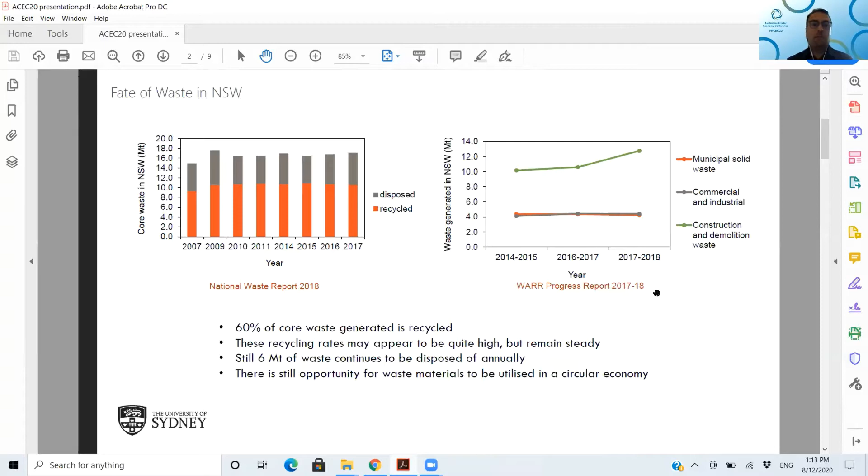So because of the similarity between these and the materials that we use in roads and pavements, there is a great opportunity here to reuse them in road construction. Circular economy in New South Wales in general tries to keep products and materials in use for as long as possible, and adapting the same concept, we can come up with this material flow cycle for roads and pavements to reduce, divert, reuse, repurpose, and most importantly, which is the message of this conference, to focus on design of the product early on, to allow us to have that circular economy concept going.

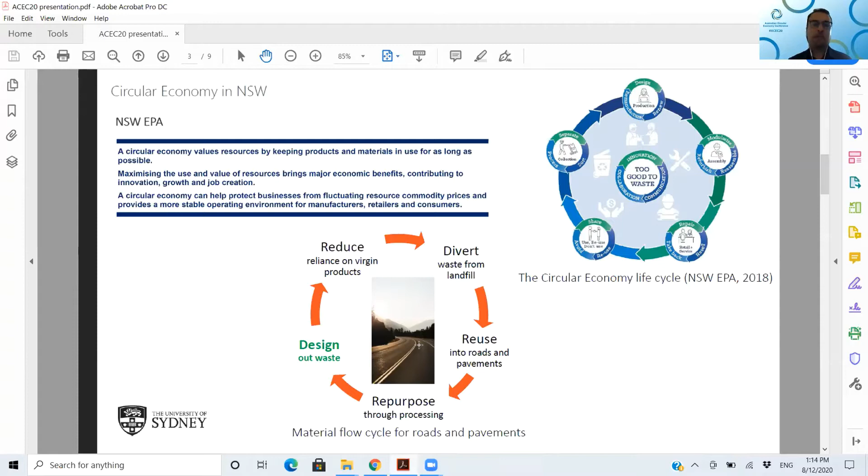One of the projects that we're very proud to work on in collaboration with LG New South Wales, and I'd like to thank LG New South Wales on behalf of the Waste Transformation Hub for this great opportunity, was to develop a guide for local councils about recycled materials in roads and pavements. So, 2 documents.

About the guide, just in a nutshell, the motivation was: we all know that recycled materials like glass and plastics are already being used and trialed in roads and pavements by councils, but there are always concerns about compliance with EPA requirements, the public perception of health and safety, and of course the cost to the council, and the challenge is to generate that confidence. So the guide offers guidelines on how council engineers can make an informed decision about starting recycling projects and how they can incorporate that in roads and pavements.

And it tries to do that through 6 chapters, which I'm going to explain in a nutshell. We try to break down the whole process into key implementation steps. So if you are a council engineer and you want to start a recycling project, you first start by reviewing what the options out there are. Chapter 2 tries to give you that sort of knowledge. For example, you know that glass or fly ash is already being used, so that gives you the green light to move forward. And then you go to step B.

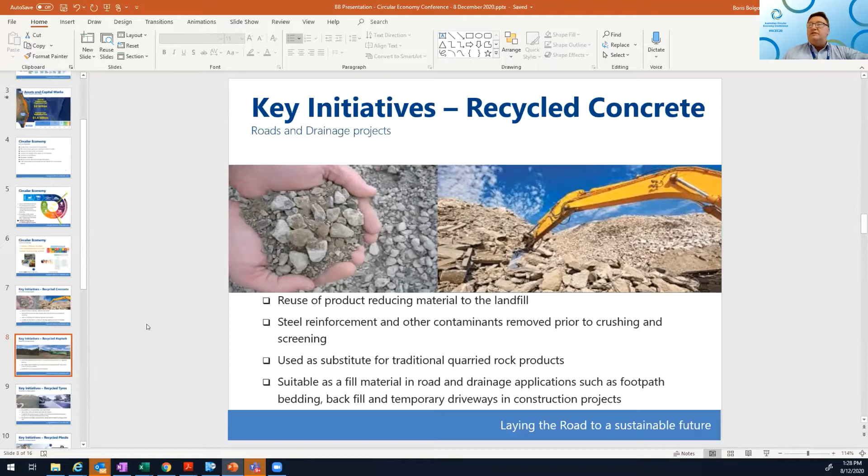So recycled concrete has been around a while, used as a great base in a lot of road and path construction. We've got recycled asphalt. Again, it's been around quite some time, but it means we're not having to use some of that natural resource that I mentioned earlier.

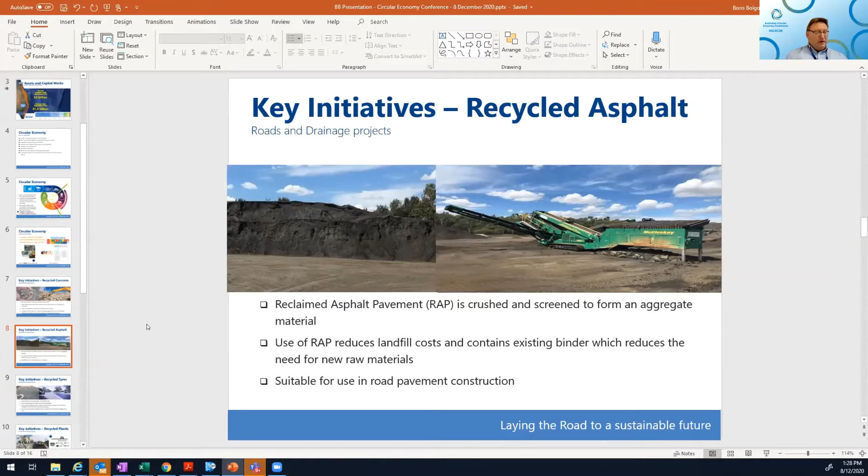So recycled tyres, using your spray seal. So that's combined, using recycled truck tyres combined with your bitumen. You can get, again, a product as good or better than what you would get without that material.

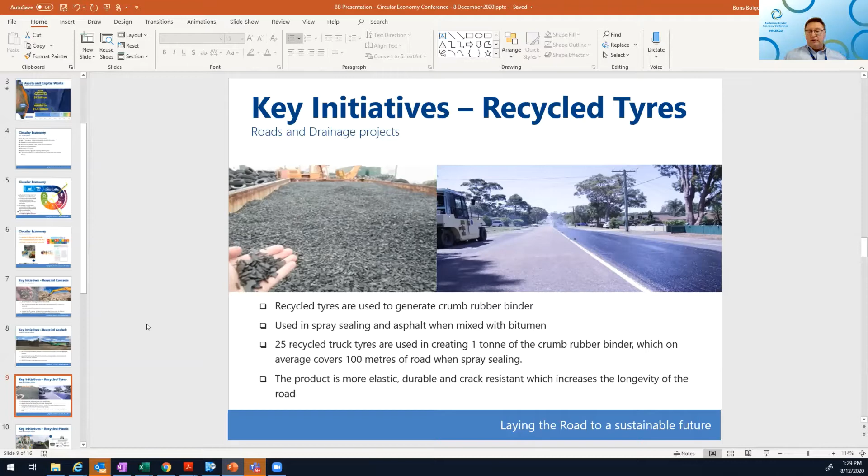So some of the techniques, again, getting it out there. I tend to use LinkedIn. So sometimes we promote these, do a media release, and then put that out on LinkedIn to try and get a little bit more, again, visibility, traction in this space.

Probably running a little bit behind time, so I'll speed up a little bit.

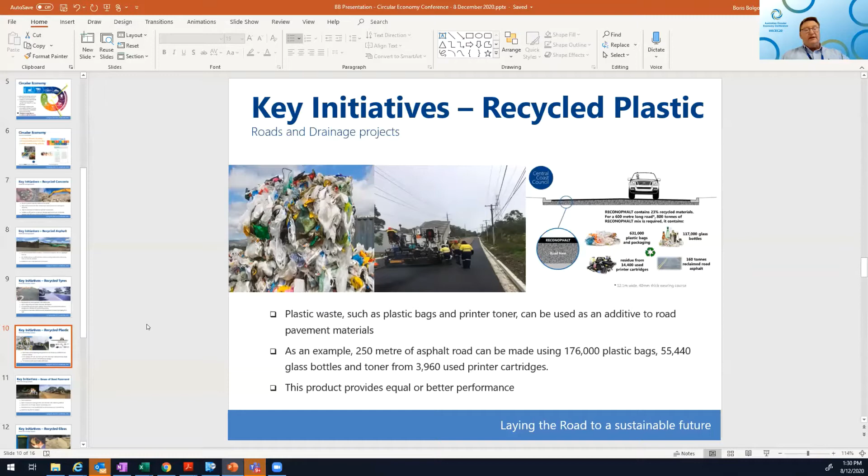With this, the other initiative, because there was glass in there, plastic bags, we targeted some schools where we had to do renewals, and we got the kids to collect the materials that actually went in their road right in front of their school.

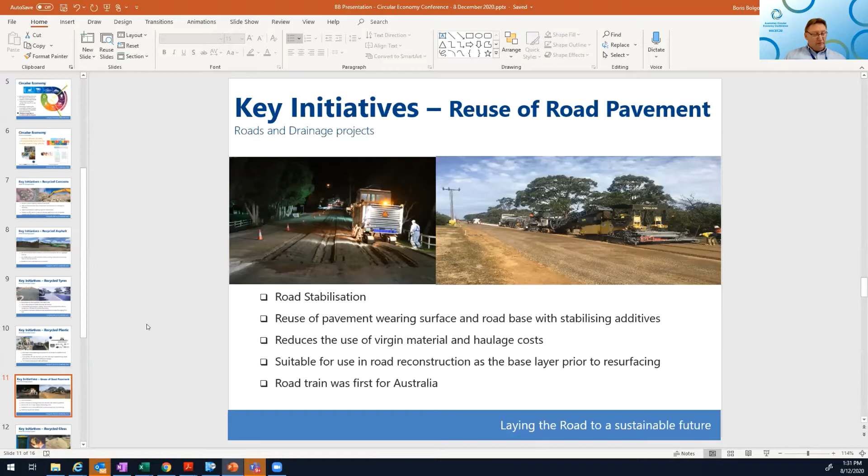Just another project. This was an Australian first. This is road stabilisation. To the left is the conventional method. SPA, one of our contractors, brought in some machinery from Germany, and we had this road train which uses a foam bitumen, and I suppose for some of those councils that are in regional areas, this can do long areas very, very quickly, and gets almost to an asphalt type surface at the end. So if there's any questions, again, certainly prepared to talk to people a little bit more about those sorts of things.

The other thing, just in relation to some of our partners, we've got obviously collection with the yellow bin. So glass goes through there. Our partner is IQ Renew that collects that, and they are separating all the bottles. Some of the challenges here is that the quality of the glass was fairly poor because it had a lot of the stickers and the wrapping in that, so it didn't actually act as free draining sand.

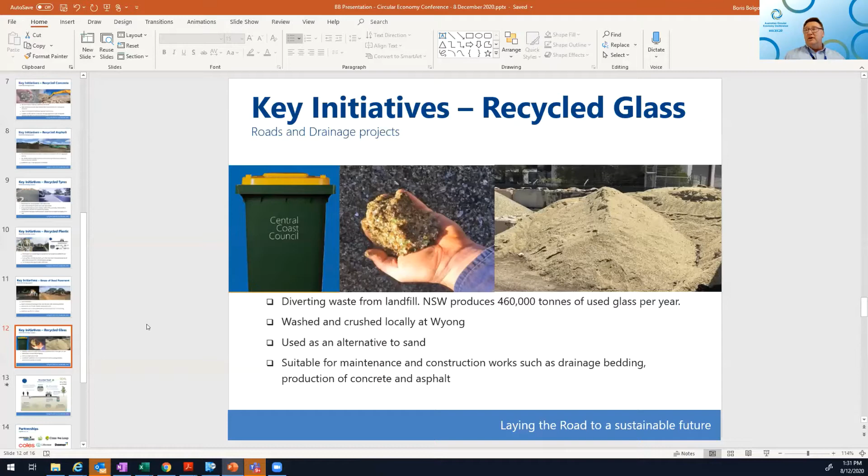Working with us and with our lab, we certainly got them to put another cleaning process in, which went really, really well, and it's almost like beach sand when you look at it. I suppose success for me is when the staff start coming to me and asking me, what about this, can we do that? And got the idea of, can we make a recycled road? And we got to about 90% recycled.

From the pavement area, we're certainly using existing pavements, bringing them back, using the recycled concrete, using the glass, talking to suppliers about putting fly ash in the concrete pipes and using recycled sand and glass in the pipes, recycled plastic pipes for the drainage, the subsurface drainage, even the pathways. Again, rather than using steel mesh, using recycled plastic as that reinforcement.

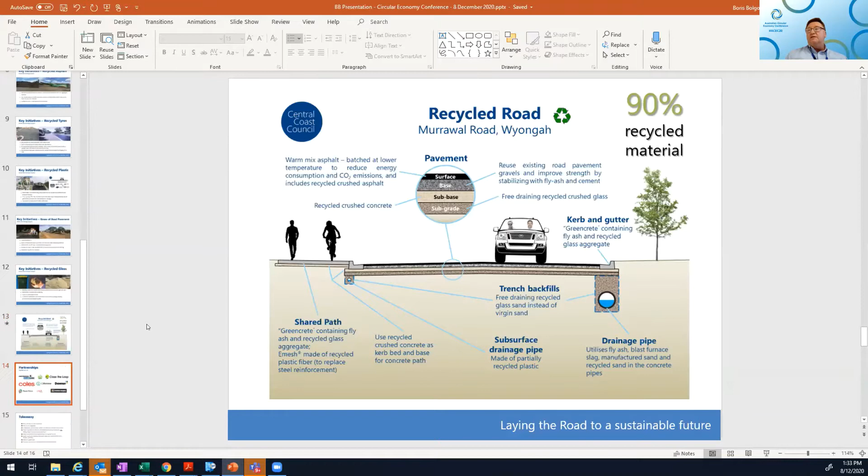So again, that's probably one of the highlights for me, as I mentioned, that staff are coming and changing their mindset. I mentioned partners and that relationship. I think it's really important that you get that and invite people in and have a talk about what they have to offer and what you can offer. So there are a few of the partners that we've certainly been dealing with.

So last slide, so Jen, don't worry, I'm almost done. Just think about your audience and how can you make that difference. I've mentioned to you, talk to your suppliers. If it wasn't for me inviting Jim Appleby from Downer in probably 12 years ago to talk about improvements, we both might have gone down different pathways.

That continuous improvement culture and making sure that you consider the cost as well as the environment. So you just need to think about how you've structured your areas if you're in local government. Have a go. Sometimes I have to say, look, we're going to do this, and that made a difference, but I did think about the consequences and have plan Bs in place.

Talk about these things with your neighbouring local government areas. Use avenues such as IPWEA and those regional platforms to get some of that sharing out there. And as in the regional area, understand your strengths, your gaps, your opportunities, and take action. Promote good work. In dealing in a heavy engineering space, I'll talk for myself, I'm not good at blowing my own trumpet, but engineers are doing some great work, but they're not getting some of that promotion out there.

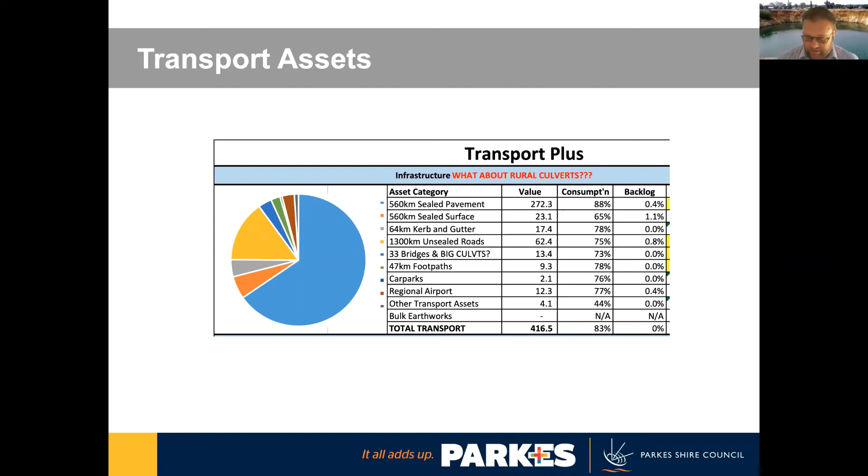But you can see there some of the key considerations, again, from a regional council, 416 million total value for transport assets. And as an indicator of overall council expenditure, transport, especially from a capital perspective, is certainly, from Parkes council's perspective, 40 to 50% in some cases of total council capital expenditure. So there is a key driver, I guess, for rural and regional transport engineers to make the dollar spread as far as possible, which is one of the key considerations for material use and construction techniques.

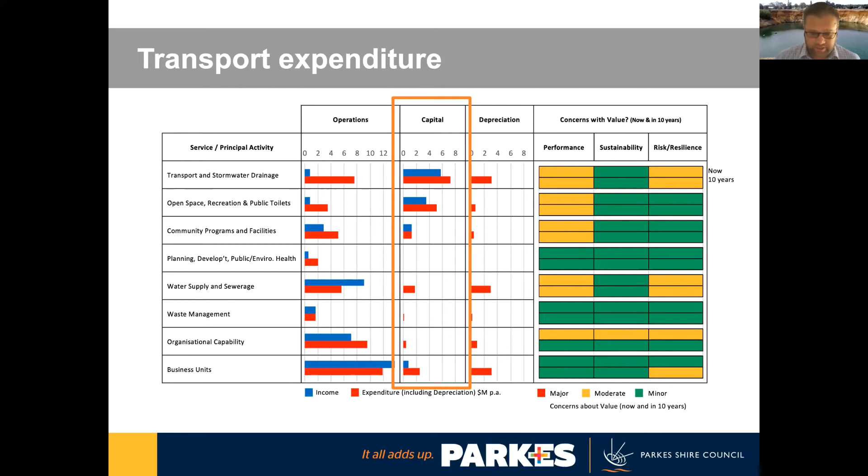Now, again, for Parkes as the example, there is a massive backlog gap for funding in relation to the number of roads that don't currently meet the expected condition for the road users. And I guess where I'm going, I don't mean to sound negative, but I think one of the key considerations from a rural perspective is really the funding gap, and that is a real consideration when it comes to potentially looking at a slightly more complex delivery of a road program where substitute materials may be considered by an engineer that is unfamiliar with them.

So really, from a rural perspective, we're looking at balancing short-term lower cost versus the longevity of a higher upfront cost but longer life cycle cost. And at the end of the day, with short funding cycles, unfortunately, the upfront lower cost usually wins out on an annual basis.

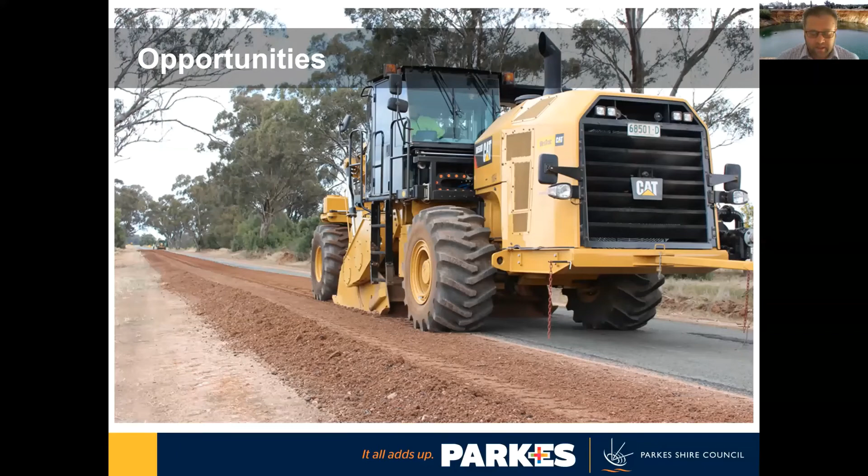But I guess at the end of the day, it really also comes back to, from a rural perspective, geography, the availability of products in a high enough volume and at reasonable cost to then deliver those for use in those projects. One of the key considerations for that then obviously is supply chain. Now look, I'm just going to touch on the Parkes Special Activation Precinct, not by way of marketing, but purely as an example where I think that as asset owners, in this case road asset owners, as a key part of the circular economy delivery, we need to potentially be looking upstream and working with the contractors, the companies that are potentially looking to commercialise products.

And so I think a key part of that is essentially driving the need for those products, providing the suppliers a confidence that there is a market out there, but also really understanding the logistics of that and really getting efficient at how those products can be moved around. There is a large volume of waste material in key areas, obviously metro areas, and there is a large geographical area to spread that across, for example, here in New South Wales. So a key part of that obviously becomes working with logistics operators as well as working with companies that are looking to pilot or commercialise products to get those into the market.

So the Parkes Special Activation Precinct here as an example, being an eco-industrial park which seeks to really promote resource recovery and other activities while linking those directly back to key transport linkages north, south, east, west across the state, I think is just a good example of where as asset owners and as engineers, we should also still be looking both upstream and downstream as part of that supply chain to drive the right outcomes.

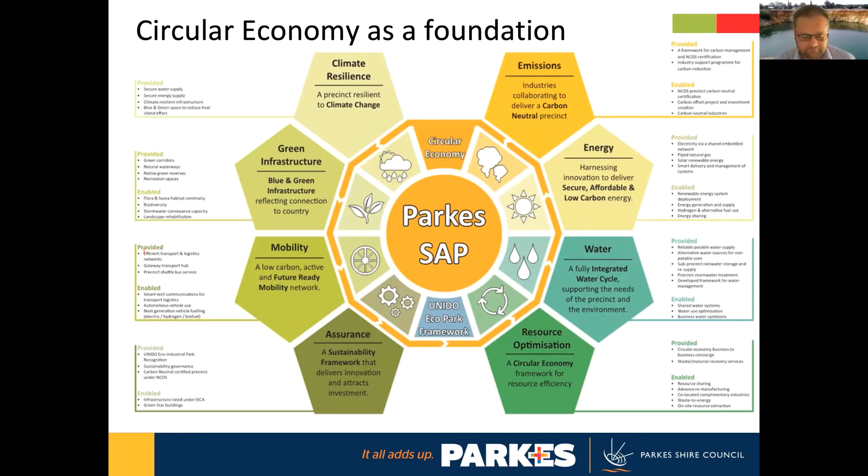And I know a lot of you would be interested to hear what the Southern Sydney Regional Organisation of Councils is doing with their Paving the Way project. So can I introduce Justin Bonzi, who is Strategic Lead Resource Recovery at SSROC, whose 11 member councils in Metro Sydney manage about 20% of the waste in New South Wales. So I'll hand over to you now, Justin. Thanks very much.

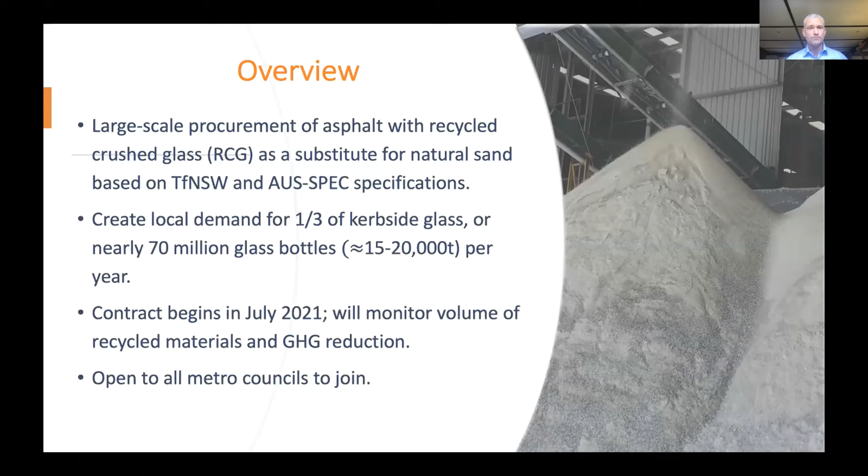So why did we do this? Firstly, a regional waste policy of SSROC is that we're responsible for all of our own waste and managing it throughout the life cycle as close as possible to where it was created. So building in the proximity principle, it's not adequate to leave it to others to hope they solve the problem. We want to be as responsible and accountable to our residents as possible and really try to find solutions for this.

So in 2017, China's National Sword policy and the subsequent COAG export bans revealed a critical shortage of domestic markets and processing infrastructure. A lack of viable markets for these recycled materials threatens curbside recycling and increases prices. And all local governments are in a strategic position to drive demand by incorporating Australian recycled content, which then stimulates infrastructural investment and job growth. The key here is Australian recycled content. Having recycled content is great, but having it locally recycled has that additional stimulus on infrastructure, jobs, and the local economy.

So why glass versus plastics or anything else? It's been tested and proven by SSROC and other New South Wales councils now for decades. There are widely accepted and respected specifications. So Transport for New South Wales and AUS-SPEC, like I said, having updated their specifications last year, that was pretty much opening the gates wide and taking this and running with it.